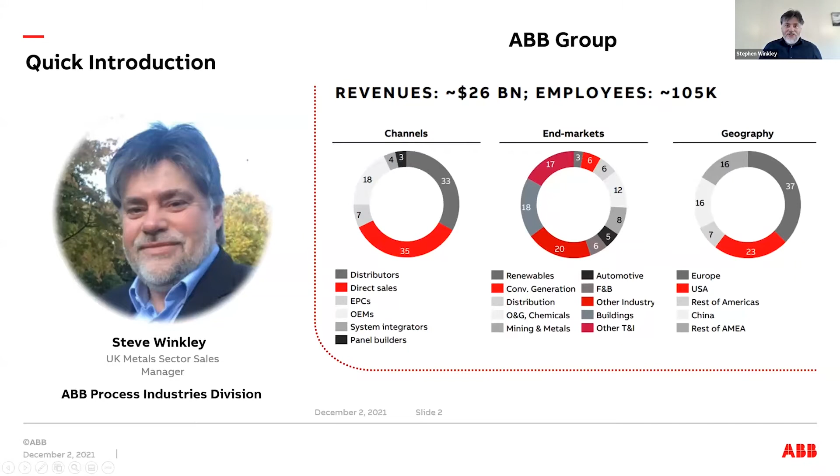So if we just start off, ABB is a big company. I'm sure everybody knows it's a big company, but just to show how big it is, there's 105,000 employees, and we work across lots of sectors, metals and mining being just one of them. We supply products, but more importantly, for the metals and mining sector, we supply solutions. Quite a big company, difficult sometimes for people to get hold of what we actually do. But the thing that's important is that we supply solutions, trying to tie things together.

So a lot of the effort I've been putting in at the moment with customers is looking at optimizing the processes that they have at the moment, trying to do that in a way which moves towards a future but also gives some real benefit. Examples of that might be looking at somebody's reheat furnace and making sure that the demands of the reheat furnace to reheat material are tied up with the demands of the production process, and the production process is really smooth. That optimizes the amount of energy you use to actually make your process.

Simple things, but there's a real opportunity across the sector now just to do simple things to save energy and to combine processes together.

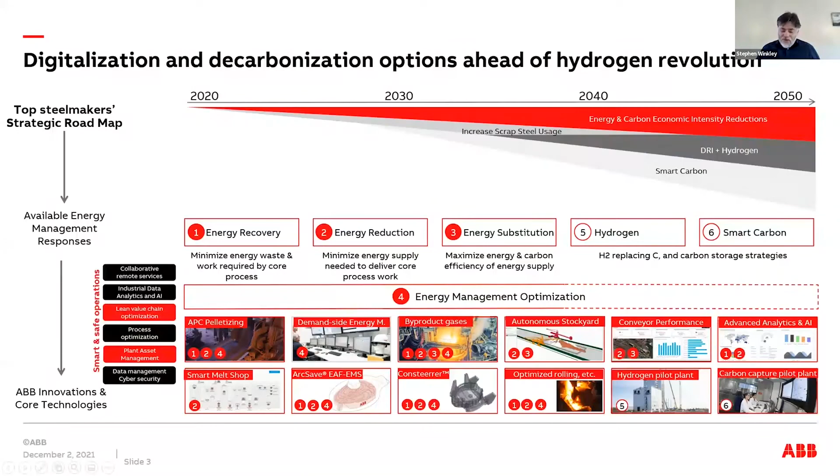I'm just going to flash through some of the stuff we're doing now. I'm not a metallurgist, but we have a very large metallurgy department. We're really looking at what you can do to optimize arc furnaces by using electrical means - that's electromagnetic stirring. We're looking at what you can do with casting processes using electromagnetic stirring, and how that actually makes real world savings.

It moves people towards the future. If you save energy now, it's a good thing - it makes some money to start looking at your digital future. But optimization, whatever happens, is really important in the process.

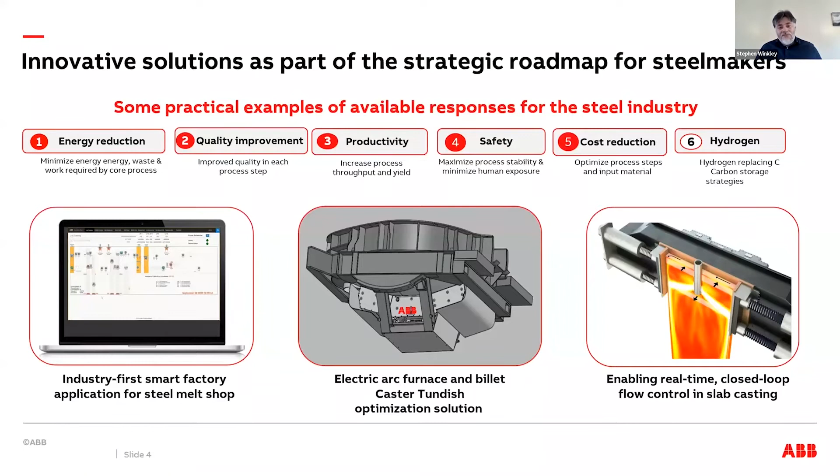So I've got some areas here which I'm going to go through quite quickly. Our first one, talked about digital - this is a customer with a melt shop, typical melt shop, lots of manual operation. We've got guys on cranes with paper schedules, and everything that means from an energy point of view, things aren't connected together. And if things aren't connected together, you're losing lots of energy, you're losing lots of money.

So the challenge is, how do you tie up cranes, ladles, schedules, movement of material, the best order to do things in a busy melt shop? How do you tie all that together?

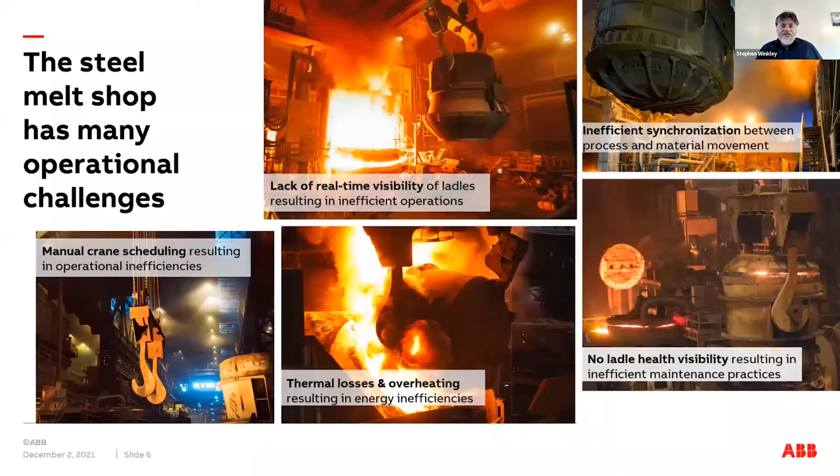So we've got our smart melt shop - this is real smart factory stuff. We've got models to look at the thermal loss of material, we've got lots of tracking, we've got automation. We've tied the whole thing together to create a smart factory.

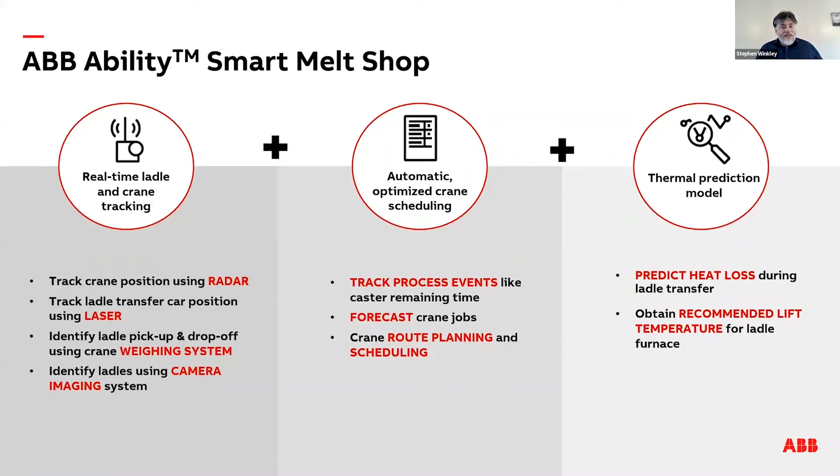That means that you take people away from dangerous situations as well. So this is real, this has happened - this is in India.

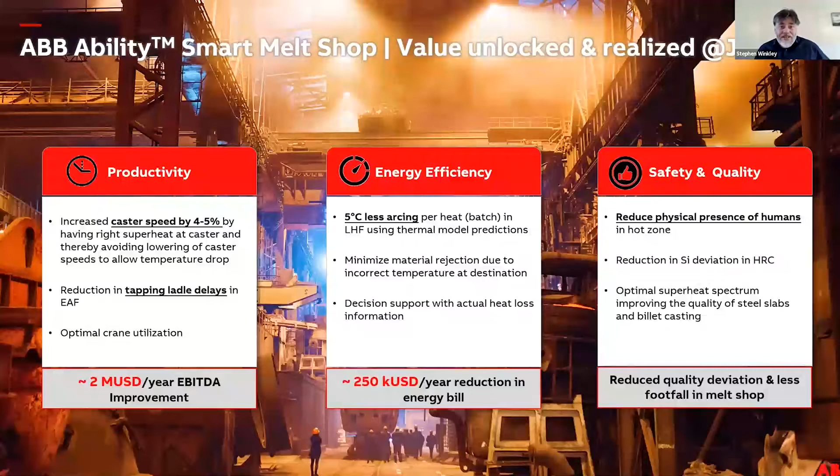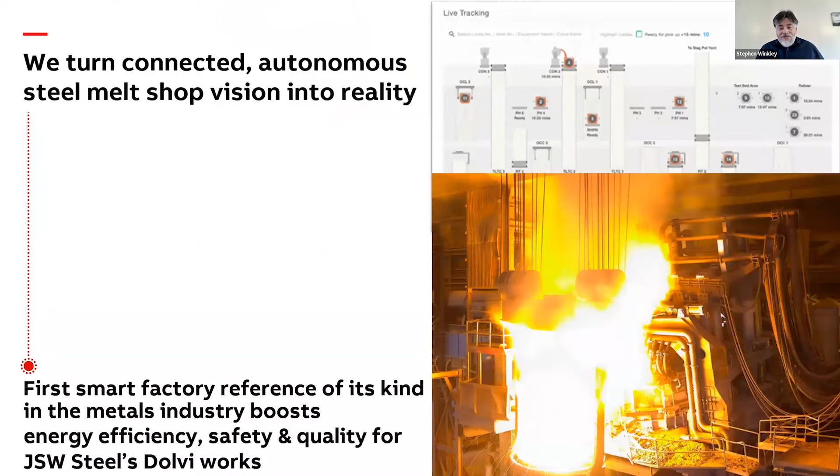Some really big numbers coming out of it - $2 million a year EBITDA improvement, $250,000 on your energy bill reduction. Really, really big stuff. I think this is a transition technology. We can talk about getting to the future with hydrogen, but it's really important to have optimization now.

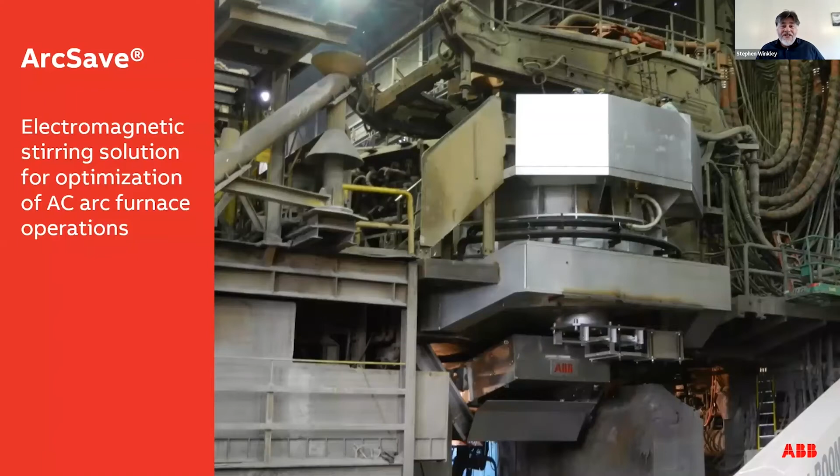Something we've been working on for a long while, using electromagnetic stirring. It's not new, but it's getting bigger and better. This is where you improve quality in the arc furnace using electromagnetism to stir. You've got a big magnet sitting underneath your furnace, and that's making a homogeneous melt.

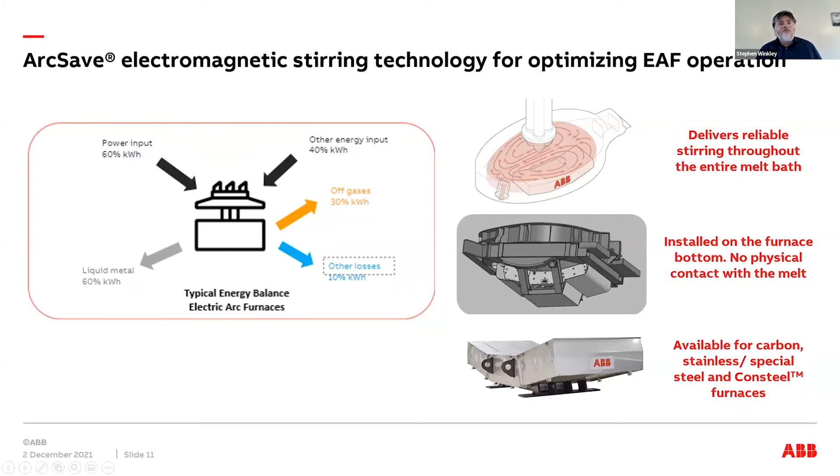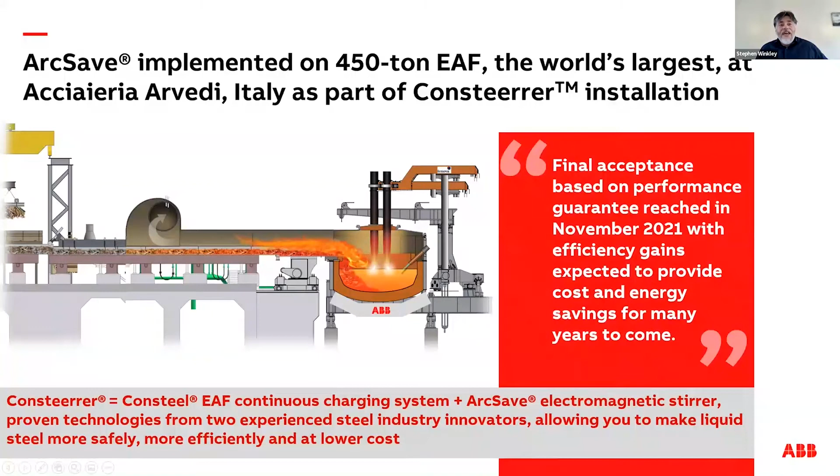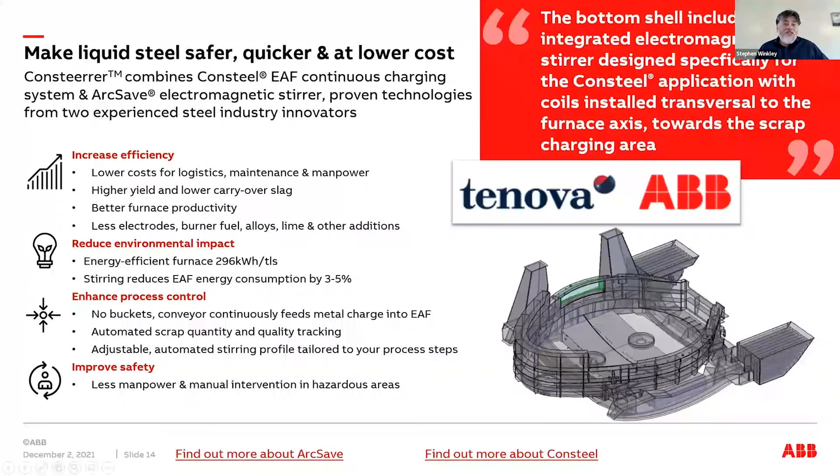You can see some of the stuff we've been doing, applying this to really big stuff now. This is a 450-ton electric arc furnace. It's big and it's working. We have partners with Tenova, where we're doing stuff - you're looking at big energy savings. It's a great technology now. It generally improves everything, you can apply it to older furnaces, and it has great payback.

So transition technology, all about optimizing. Not really any excuse for not doing some of this stuff. Energy becomes more expensive - if the industry is inefficient, that's just a bad thing.

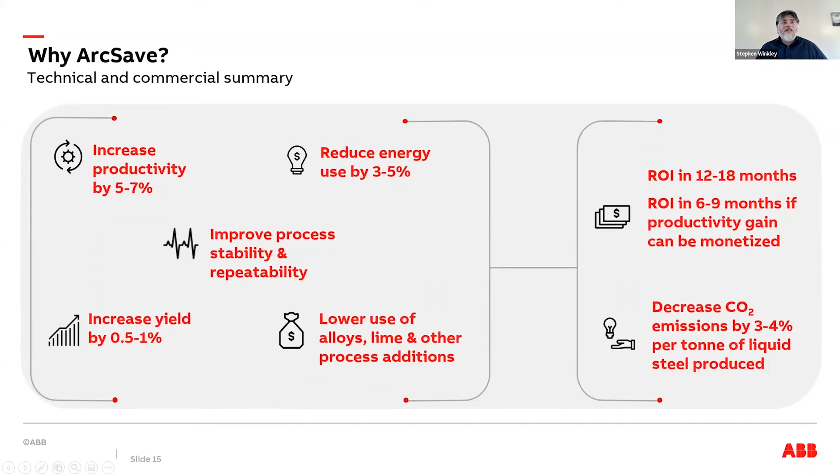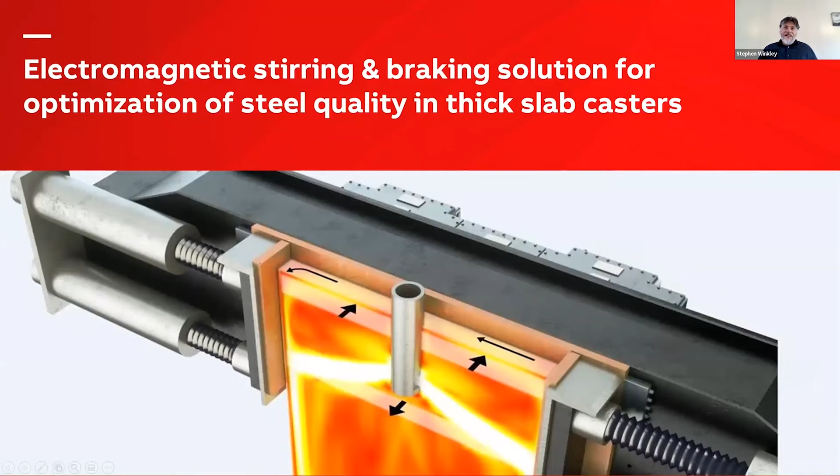Right, so moving on, same theme - this is again using electromagnetism, and this is using it in thick slab casters. Again, for the same sort of thing, you can use it for quality improvement.

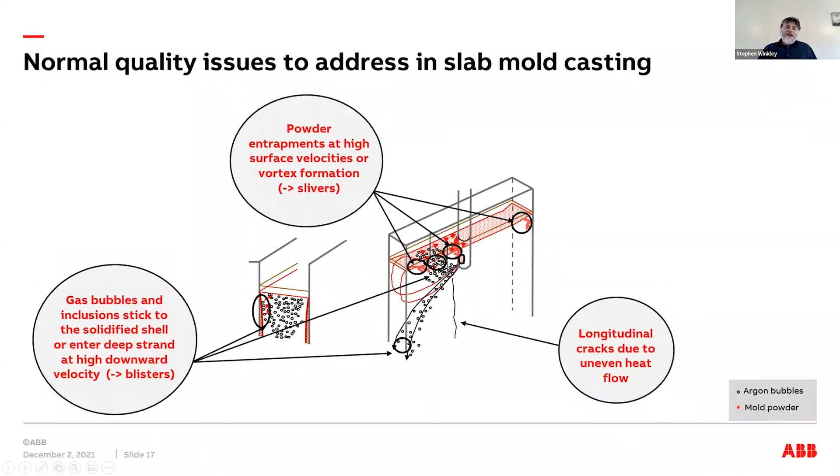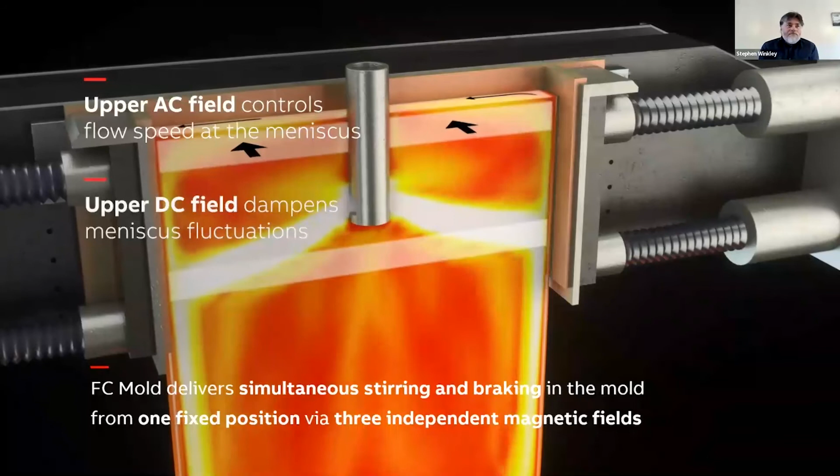Fields in the mould: one AC field controlling optimum flow speed at the meniscus for all casting conditions, and one superimposed DC field to dampen meniscus fluctuations. At the bottom of the mould, along the entire slab width, a second DC field minimises downward flow.

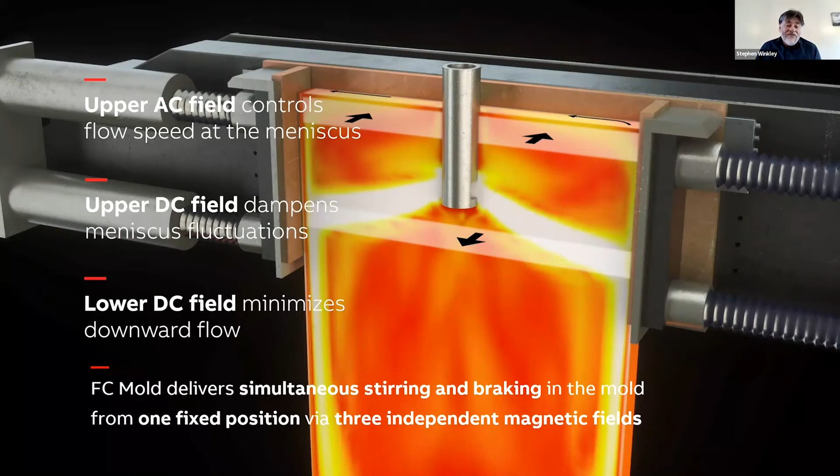So what you're doing is using electromagnetism to improve quality and flow. It's something which can be applied in lots of different ways, and I think it's got quite a lot of time to run. This is where we're working with Tata in Holland, trying to do some improvements.

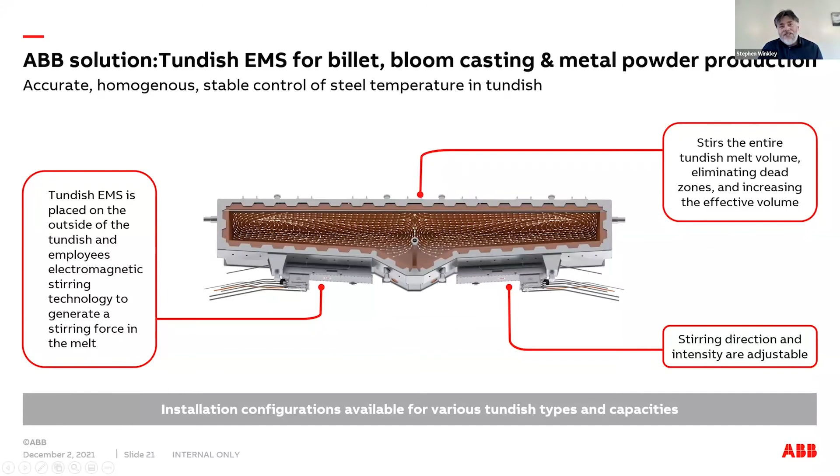Moving on to what we can do for billet and bloom casting. Same thing - electromagnetism, what can we do in the Tundish? There's an opportunity to do the same sort of thing: non-contact electromagnetic stirring, either placed on the Tundish itself or on the manipulators on the outside. Make huge improvements in the melt, in the Tundish.

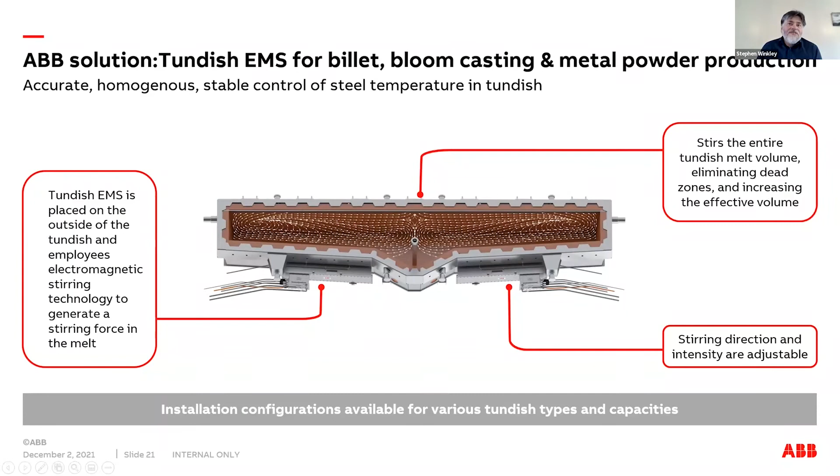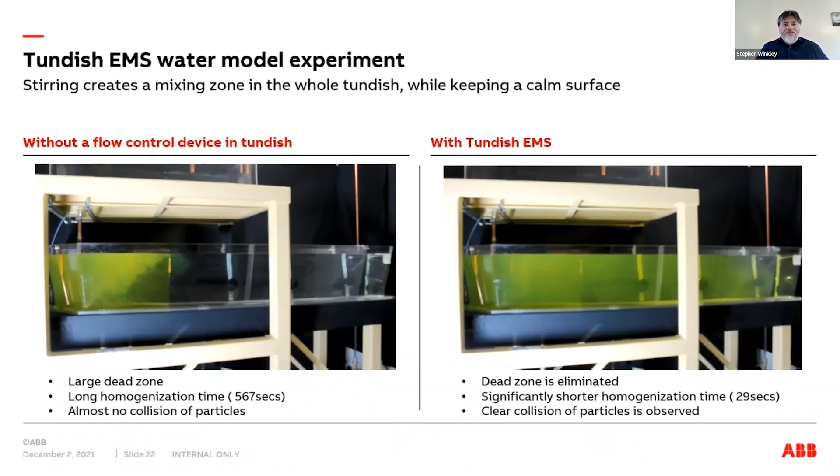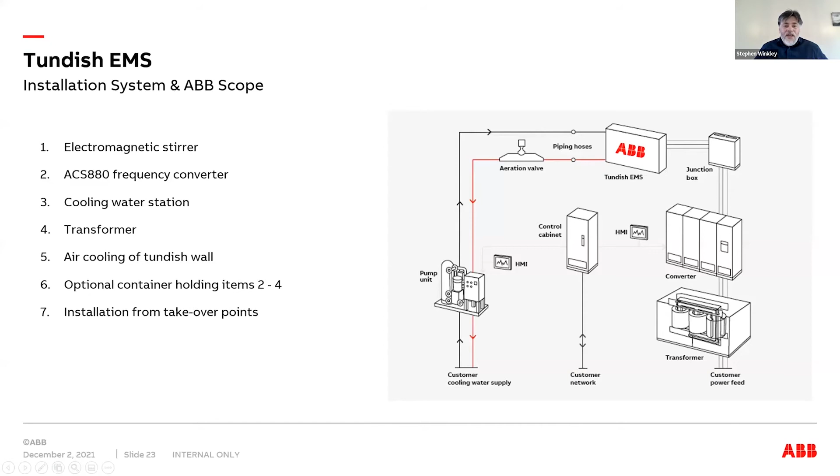Just moving on from that - electromagnetic stirring, some component parts. You've got a big converter, you've got the equipment underneath the Tundish which makes the magnetic field, and you've got some cooling equipment. It's not really any different equipment-wise from what you'd expect from a rolling mill drive and motor.

Some benefits, and this stuff's real - we've got pilot projects, a couple of pilot projects going now. It really is working, using it a little bit for metal powder production, which people then use for putting material into isostatic presses to make homogeneous material.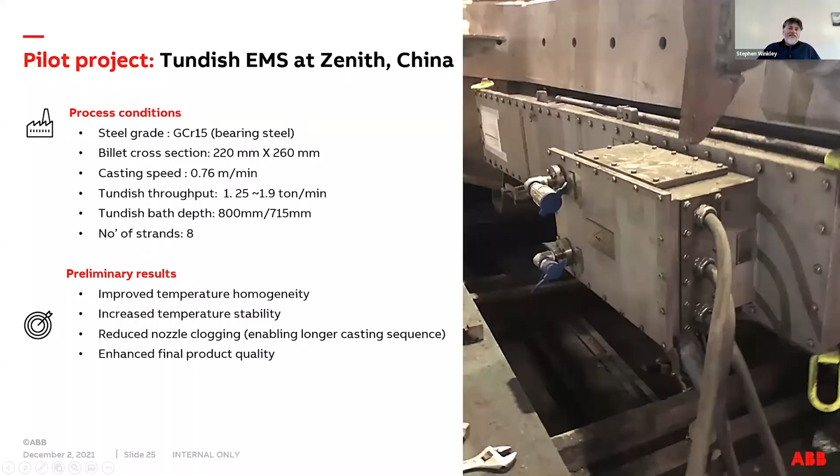Just moving on a little bit - whistle stop tour, I'm sorry I'm going very quickly. You can come back and look at the slides later in the recording.

I think the previous speaker talked a little bit about different technologies. This is really about how we as ABB can help support some of these pilot plants. It's what we're doing with SSAB at the moment - we're able to support with the electrical equipment, the control equipment, everything you need to build your pilot plant. I'm very excited to be involved in it.

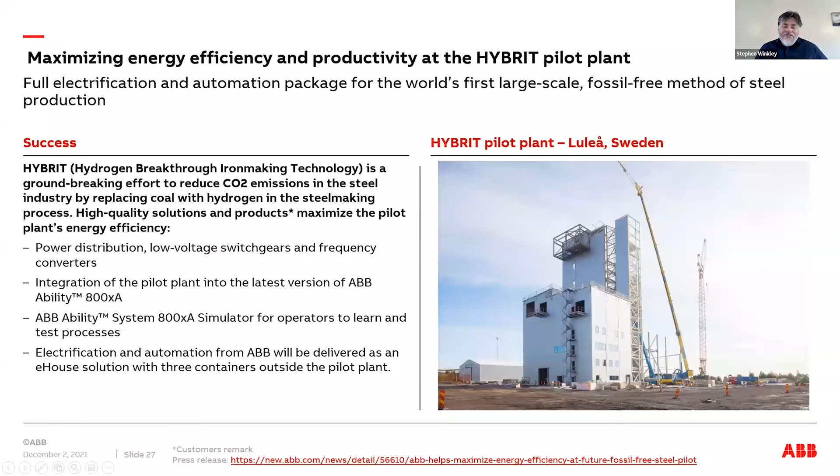So this one is hydrogen breakthrough technology - it's Hybrit for SSAB. For green hydrogen you need some really big high power rectifiers, lots of electrical equipment. Again, we can support that, firstly by supporting pilot plants with equipment, and then supporting as it goes into proper production, supporting it with delivery of projects.

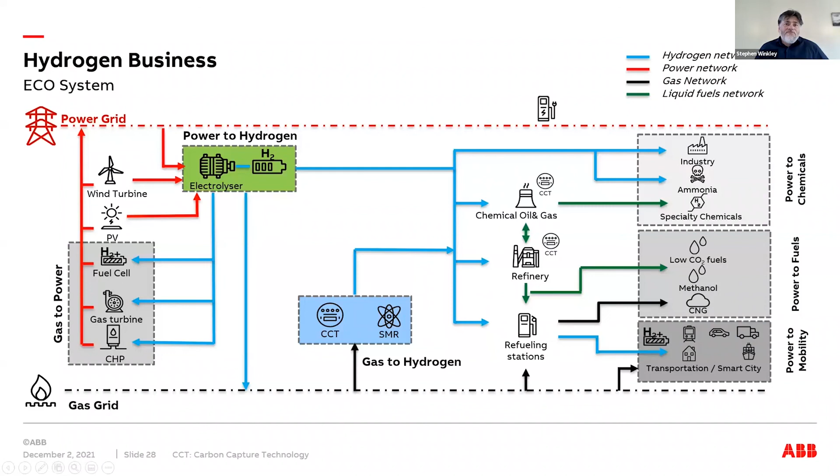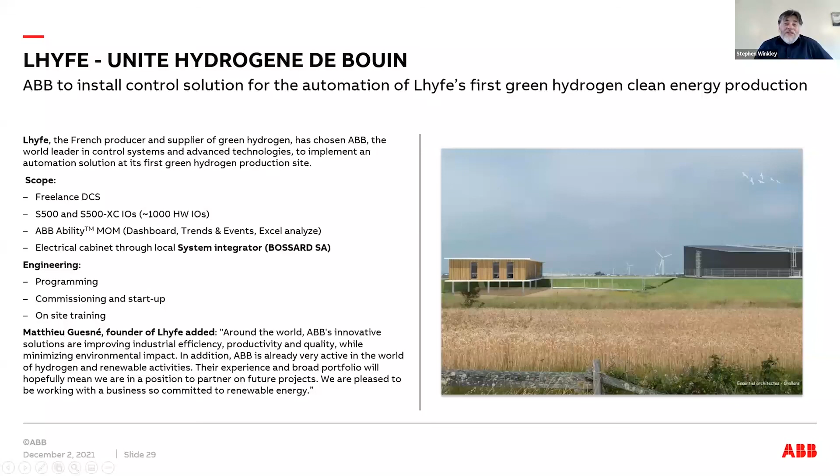A little bit here - it's another one we've done in France. Again, we support with the electrical equipment. So thank you very much.

Real whistle stop tour. Main thing, I think, is don't forget about the bit between now and the future. Have to optimize things, really have to get on with it. There's no time to waste. So thank you very much.